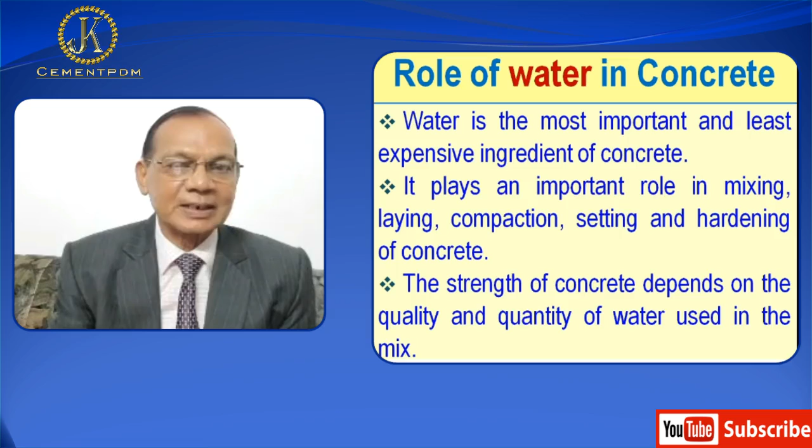Sure, Mr. Singh. Now I'll discuss role of water in concrete. Water is the most important and least expensive ingredient of concrete. It plays an important role in mixing, laying, compaction, setting, and hardening of concrete. The strength of concrete depends on the quality and quantity of water used in it.

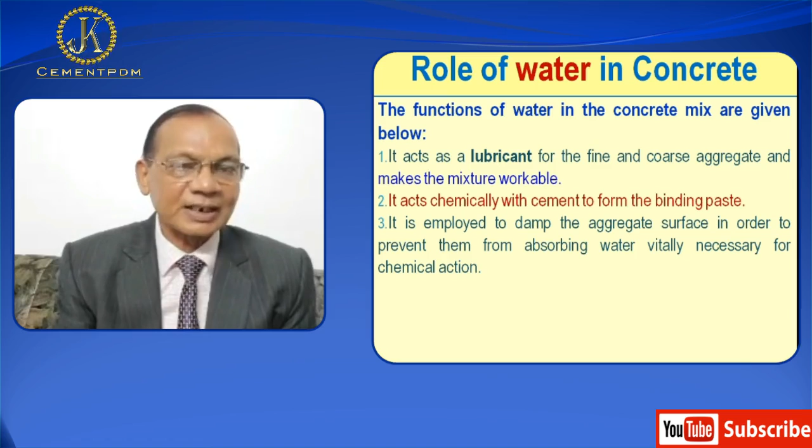The functions of water in the concrete mix are given below. I will explain it. Number one, it acts as a lubricant for the fine and coarse aggregate and makes the mixture workable. Number two, it acts chemically with cement to form the binding paste. Number three, it is employed to damp the aggregate surface in order to prevent them from absorbing water vitally necessary for chemical action. Number four, it facilitates the spreading of aggregate. Number five, it helps to flux the cementing material over the surface of aggregate. And number six, it enables the concrete mix to flow.

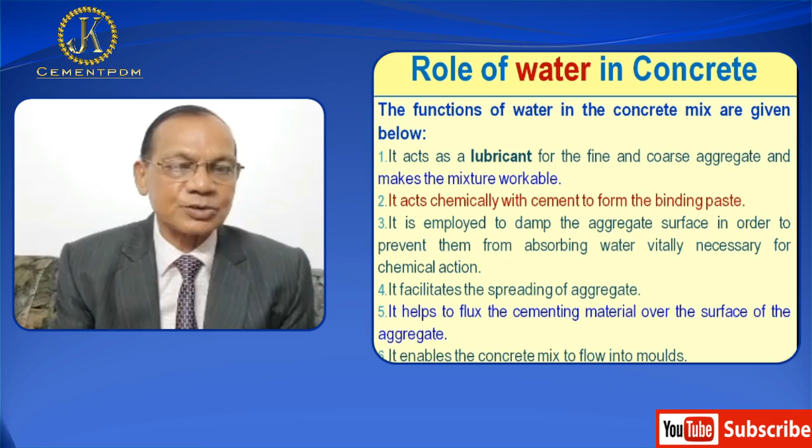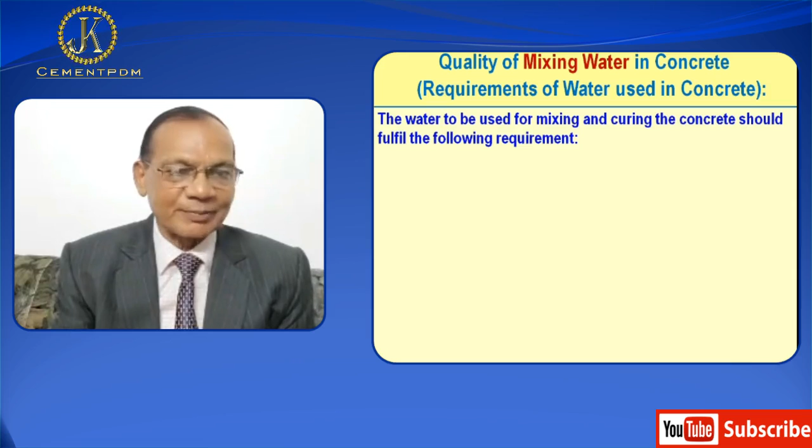Now I'll discuss quality of mixing water in concrete, that is requirement of water used in concrete. The water to be used for mixing and curing the concrete should fulfill the following requirements. Number one, it should be fresh and clean. Number two, it should be free from organic impurities, injurious amounts of acids or alkalis, salts, sugars, and oil. It should be free from iron, vegetable matter, or any other substance which is likely to have an adverse effect on concrete or reinforcement. Number four, potable water is generally considered satisfactory for mixing concrete. Number five, mixing and curing with seawater shall not be permitted. Number six, the pH value shall generally be between 6 and 8.

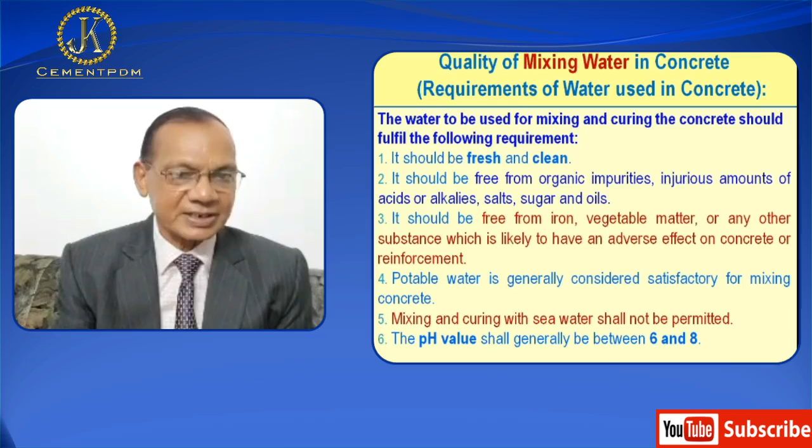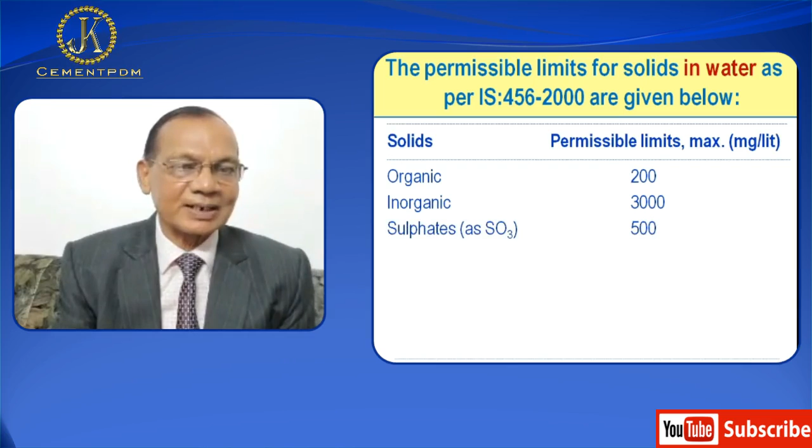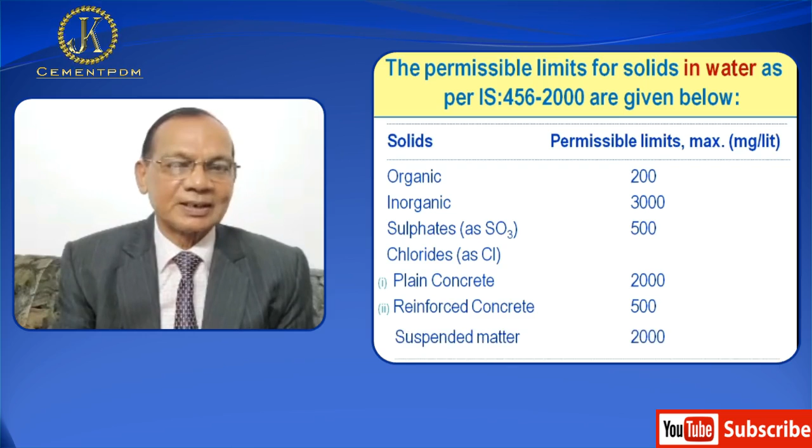Now I'll talk about the permissible limits for solids in water as per IS 456-2000. Now we'll take one by one. Organic matter, permissible limit is 200 milligram per liter. Inorganic matter, 3000 milligram per liter. Sulfates as SO3, 500 milligram per liter. Chlorides as chloride: for plain concrete, 2000 mg per liter; for reinforced concrete, 500 mg per liter. Suspended matter, 2000 milligram per liter.

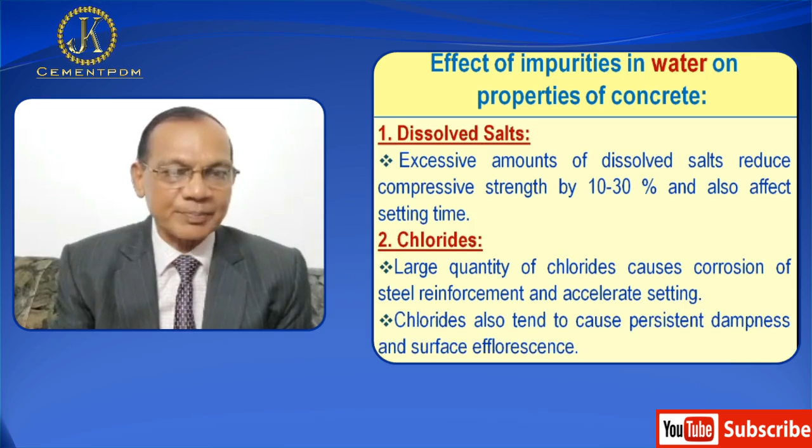Now I'll discuss effects of impurities in water on properties. First, dissolved salt: excessive amounts of dissolved salt reduce compressive strength by 10 to 30% and also affects setting time. Number two, chlorides: large quantity of chlorides causes corrosion of steel reinforcement and accelerates setting. Chlorides also tend to cause persistent dampness and surface efflorescence. Number three, sulfates: sulfates can lead to the reformation of

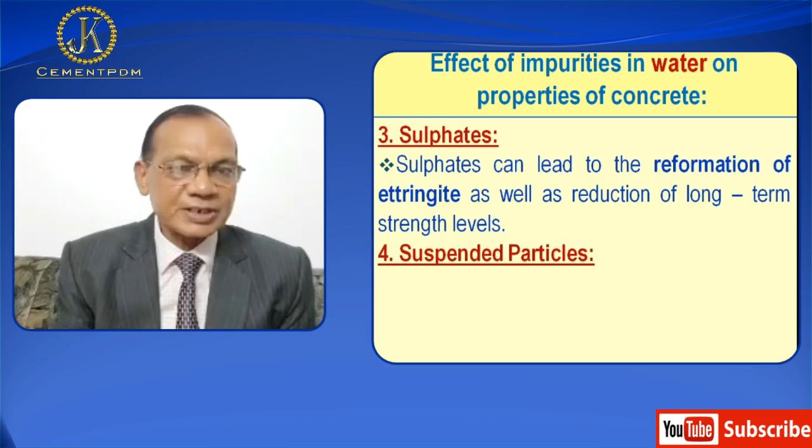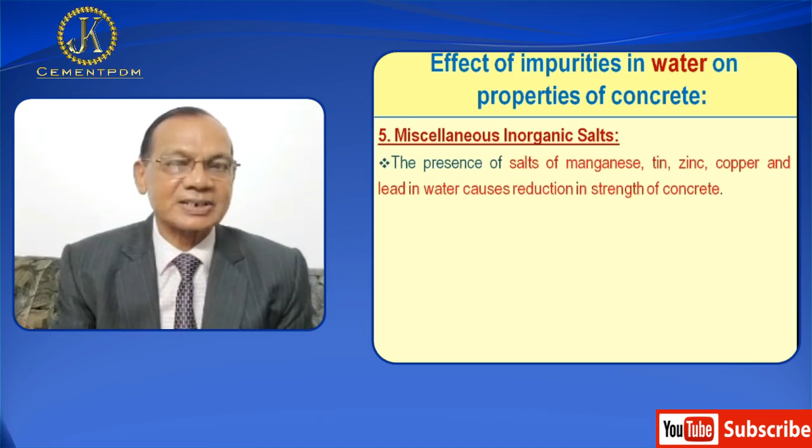ettringite as well as reduction of long-term strength level. Number four, suspended particles: high content of suspended particles of clay and silt interferes with setting, hardening, and bond characteristics. Number five, miscellaneous inorganic salt: the presence of salts of manganese, tin, zinc, copper, and lead in water causes reduction in the strength of concrete.

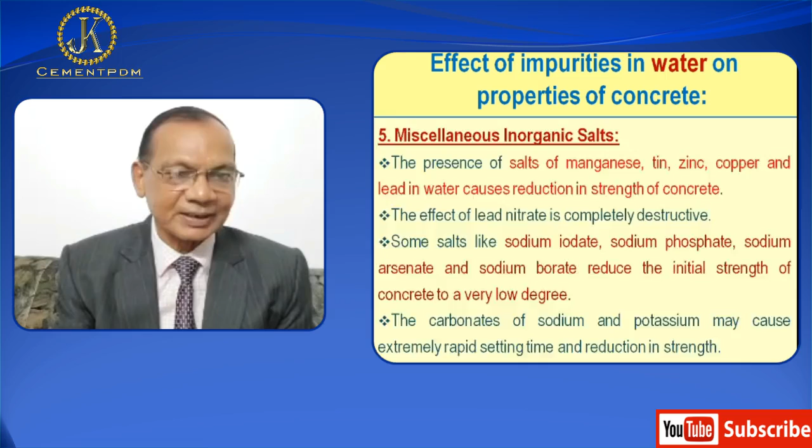The effect of lead nitrate is completely destructive. Some salts like sodium iodate, sodium phosphate, sodium arsenate, and sodium borate reduce the initial strength of concrete to a very low degree. The carbonates of sodium and potassium may cause extremely rapid setting time and reduction in strength. Number six is sugar. If the amount of sugar present in mixing water is less than 0.05% by weight of water, then there is no adverse effect

on concrete strength. The sugar content up to 0.15% will result in retarding of setting time and the early strength of the concrete, but 28-day strength may be improved.

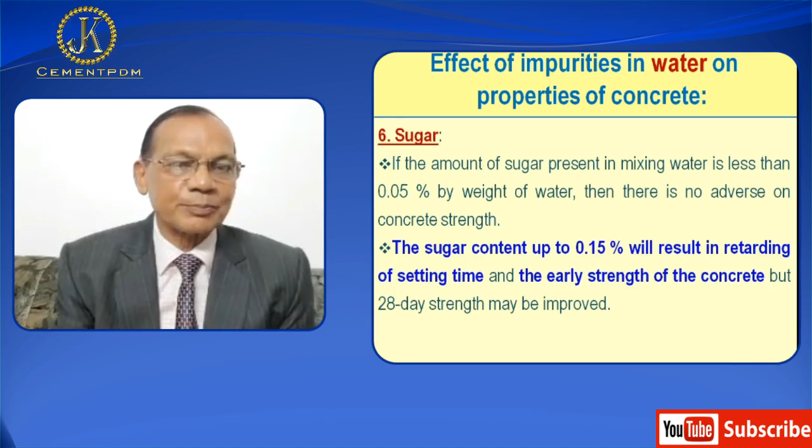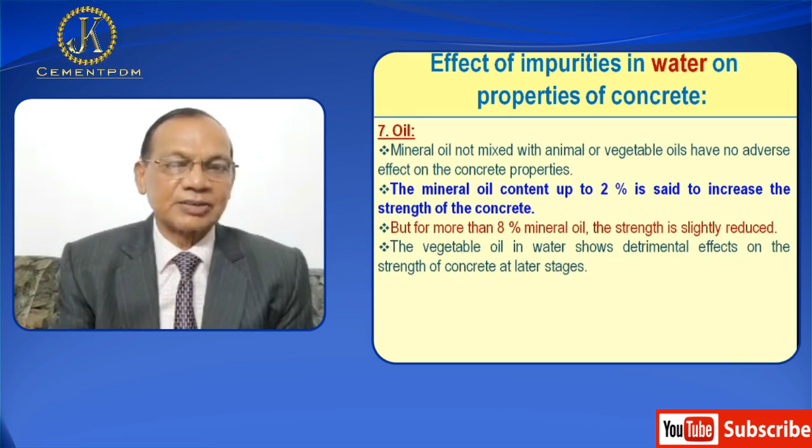Number 7 is oil. Mineral oil not mixed with animal or vegetable oils have no adverse effect on the concrete property. The mineral oil content up to 2% is said to increase the strength of the concrete. But for more than 8% mineral oil, the strength is slightly reduced. The vegetable oil in water shows detrimental effect on strength of concrete at later age.

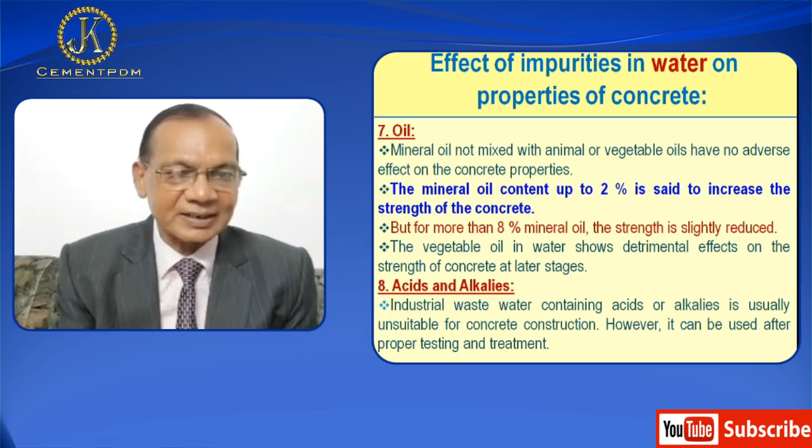Number 8 now, acids and alkalis. Industrial wastewater containing acids or alkalis is usually unsuitable for concrete construction. However, it can be used after proper testing and treatment. Number 9 is algae. Algae may be present in mixing water or on the surface of aggregate particles. It combines with cement and reduces the bond between aggregate and cement paste. The water containing algae has the effect of entraining large quantity of air in concrete and thus lowering the strength of concrete.

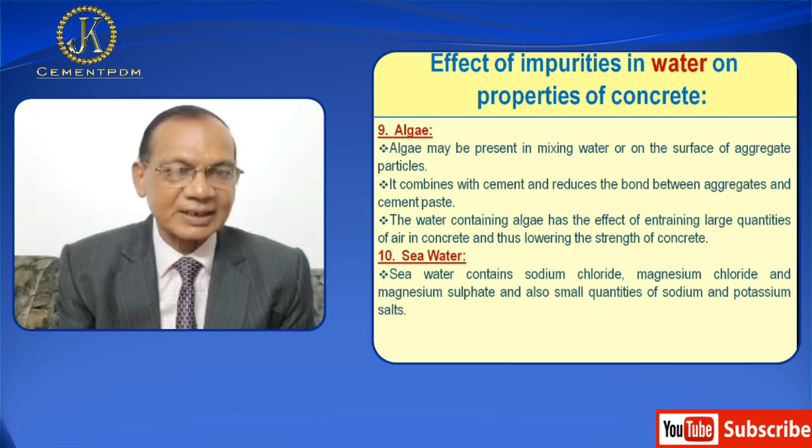Number 10, seawater. Seawater contains sodium chloride, magnesium chloride, and magnesium sulfate, and also a small quantity of sodium and potassium salt. These salts reduce strength and durability and cause corrosion and efflorescence.

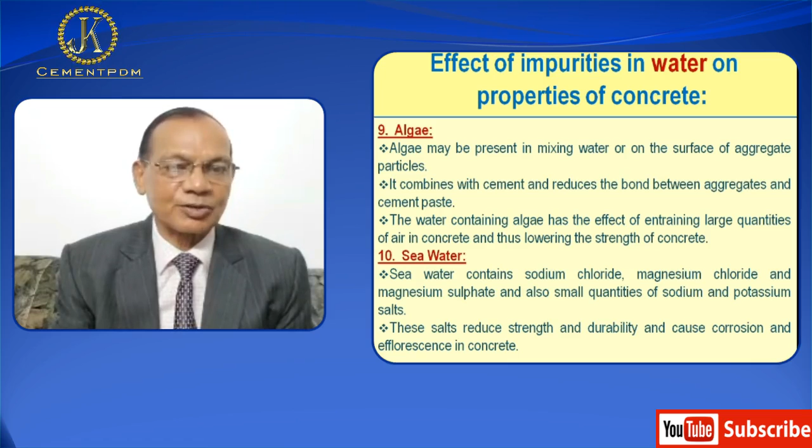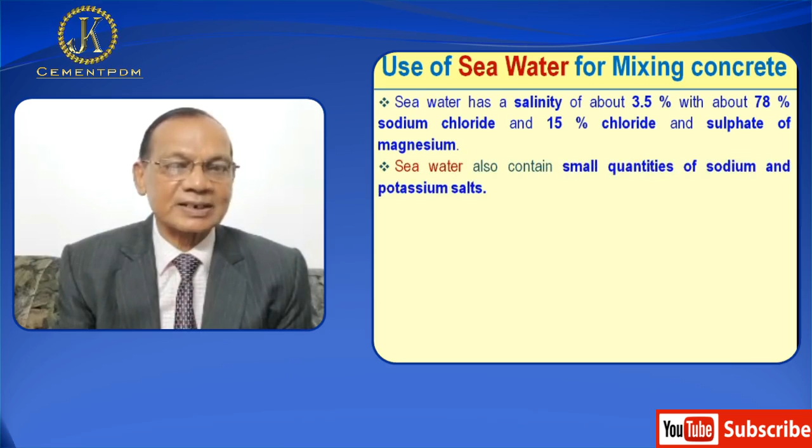Now I will discuss use of seawater for mixing concrete. Seawater has a salinity of about 3.5% with about 78% sodium chloride and 15% chloride and sulfates of magnesium. Seawater also contains small quantities of sodium and potassium salt. This can react with reactive aggregate in the same manner as alkalis in cement. Therefore, seawater should not be used even for PCC if aggregates are known to be potentially alkali-reactive. The use of seawater for mixing concrete does not appreciably reduce the strength of concrete, although it may lead to corrosion of reinforcement in certain cases.

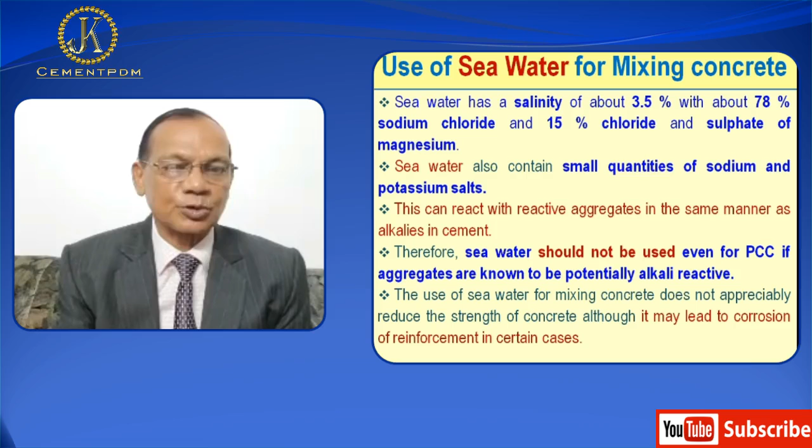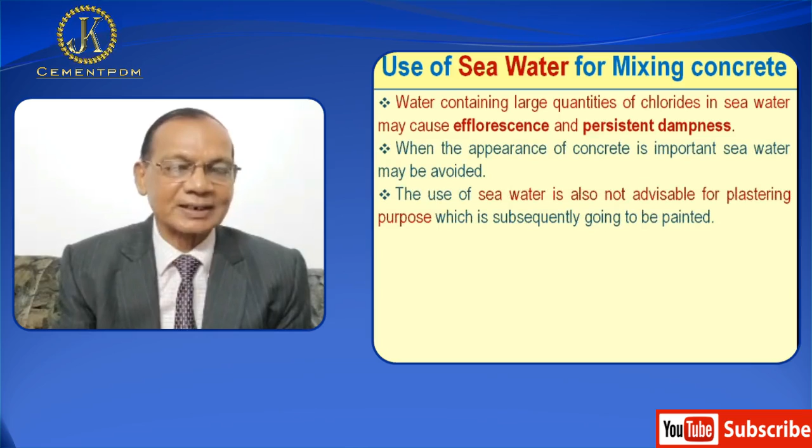Water containing large quantity of chlorides in seawater may cause efflorescence and persistent dampness. When the appearance of concrete is important, seawater may be avoided. The use of seawater is also not advisable for plastering purpose which is subsequently going to be painted. Seawater is to be avoided for making reinforced concrete. If seawater cannot be avoided for making reinforced concrete, particular precautions should be taken to make the concrete dense by using low water cement ratio coupled with vibration and to give an adequate cover of at least 7.5 centimeters.